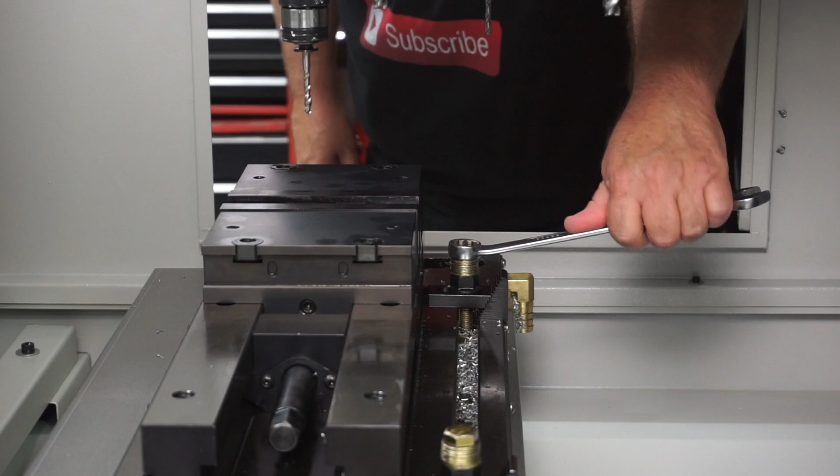No doubt if you've been following me on Instagram, you would have noticed over the weekend I've been cutting chips on my Syil X7 and making some T-nuts and toe clamps that will help to hold my brand new Orange Vise. Now, you'll probably see here in the video, guys, the reason I need to do this is because my Orange Vise, I run it parallel to the X-axis and not like the traditional parallel to the Y.

Now, this has its advantages and disadvantages, but for me, one of the disadvantages was that the 6 toe clamps that Eric sends you with your vise won't fit. So the 3 will fit on the front, but for the rear, I needed to make some extra long ones. Now, I tried to model these pretty much like the same ones that Eric supplies, and Eric's obviously made his on a mill turn machine, so I wanted to try and get that pattern on my little toe clamps, but I was limited to the size of the stock that I had here.

You can see here in the video now, guys, where I'm actually fitting it to the table. And yes, I agree it is an aluminium T-nut, but if you use the full length of the thread, it's pretty much right. And I can't see this moving anytime soon. So what I'll do now, guys, I'll cut over to the CAD video and the CAM video and just show you what I'm going to get up to, and then we'll get into the machining footage.

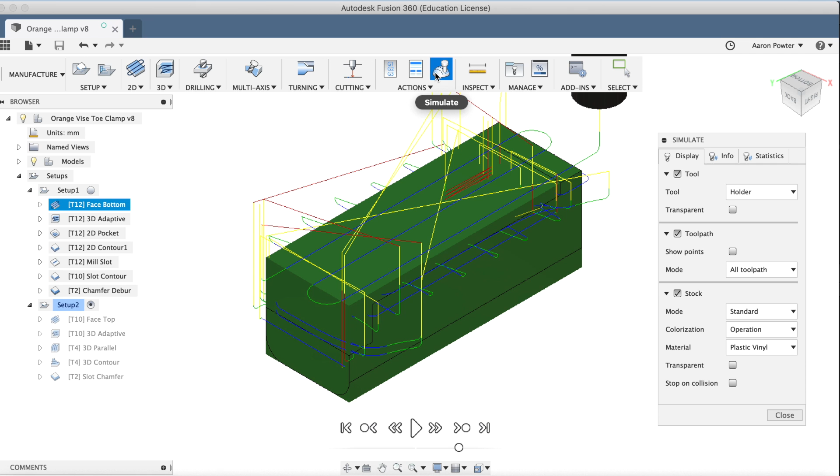All right. So here in my CAD model, it's quite a basic model. A couple of sketches, a couple of basic extrusions and features, that sort of thing. It's basic parametric modeling, nothing fancy. But the CAM here is pretty much basic on the bottom side, and I'll run through that now for you. If I do the simulation, you can see here that I'm just facing that with a 12mm end mill, which is roughly 1/2 inch. And the reason I did that is just to minimise tool changes, and it's only the bottom of the part, so I really don't care if I don't machine it with a face mill.

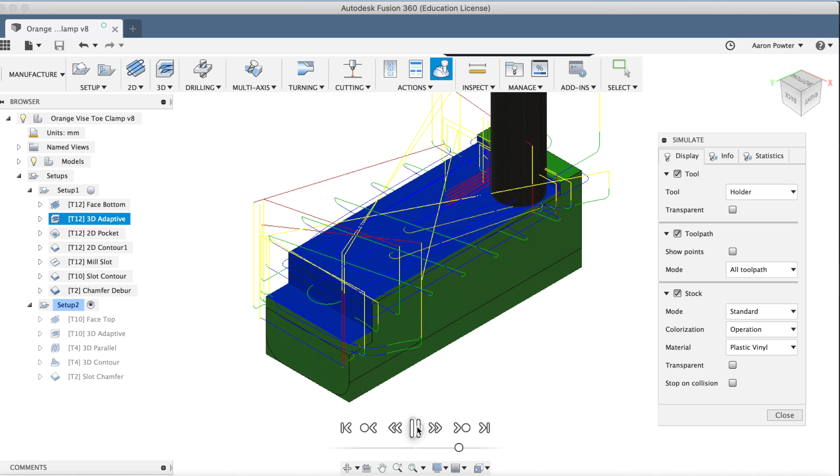In the next strategy, guys, I used a pocket strategy, and that's to clean up that adaptive clearing and get rid of those funny marks, and you'll end up with a nicer product. However, in saying that, for this part it wouldn't really matter. It's the bottom of a toe clamp, so I probably shouldn't have worried about it.

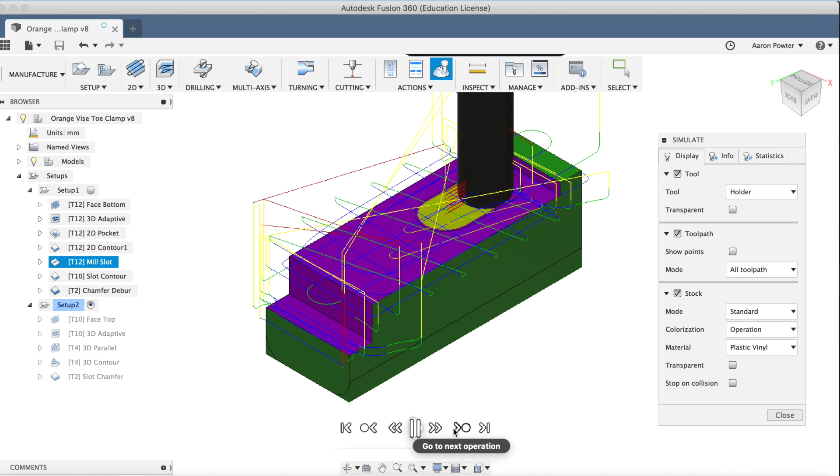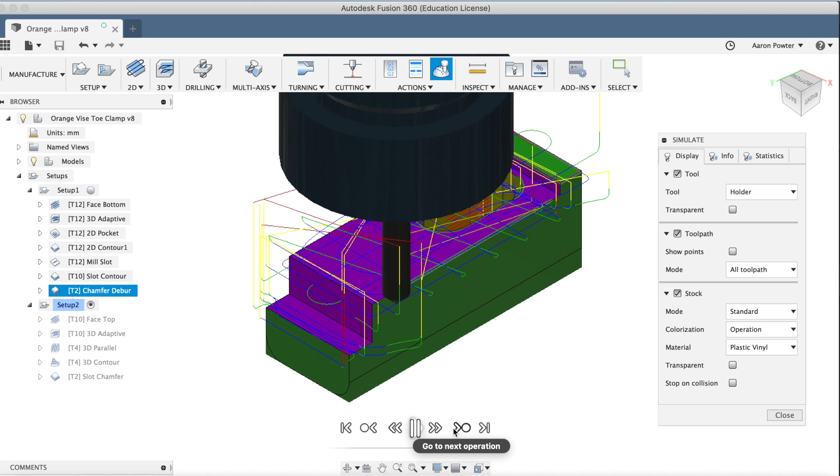Coming up here now with just a bit of slot milling, guys, to clean out that slot. It was fairly deep. It's roughly 1 inch deep, so I couldn't use my 12mm to adaptive clear it because there was not enough room for the tool to helically ramp down, so I just slotted it and chased it up, of course, with a contour, and just did a couple of multiple depths, guys, on that there to clean up the wall. You can see here my 2D chamfer to clean up the part. And there we have it.

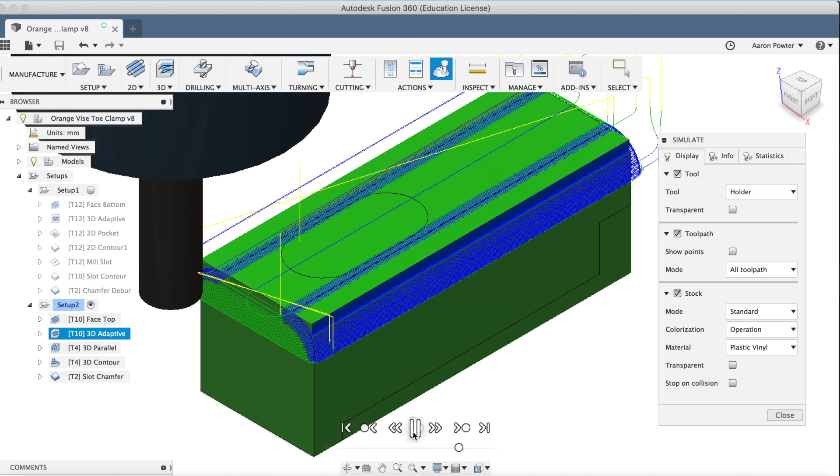So what I'll do, I'll flick it over to the top side now, guys, and show you the strategy on the second operation. And here we go. So just a quick little face just to clean up that top part. There's not really a lot of stock on there, so it's just like a little pass on the top to get rid of those dags. Here we have, guys, just a little bit of 3D adaptive to clean up those edges. And then I came in with a parallel strategy, guys.

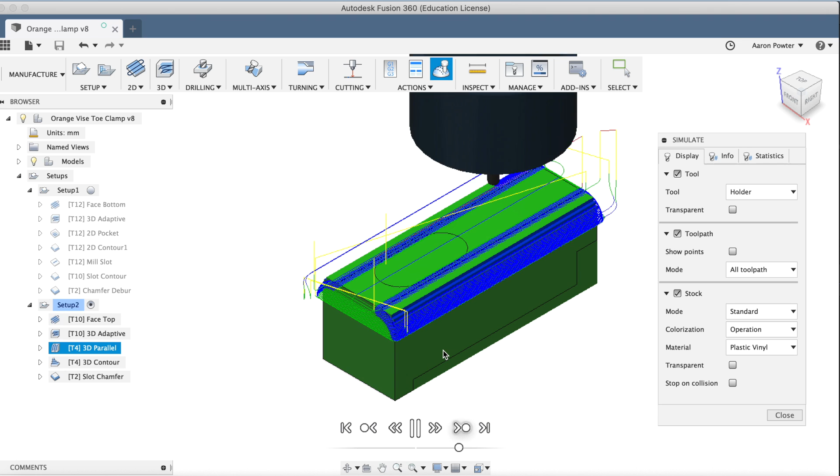Now, I could have done this with a contour, but I wanted this pattern. Now, when Eric supplies you the 6 toe clamps that come with a vise, it looks like they've been made on a mill turn machine. So I wanted to have that pattern. I'll just show you here, if you don't mind, what I could have done was this strategy here, this contour strategy where it goes round and round and round, which would have been quicker, but I actually wanted that pattern. And just the last bit, guys, was to clean up that slot on the top there.

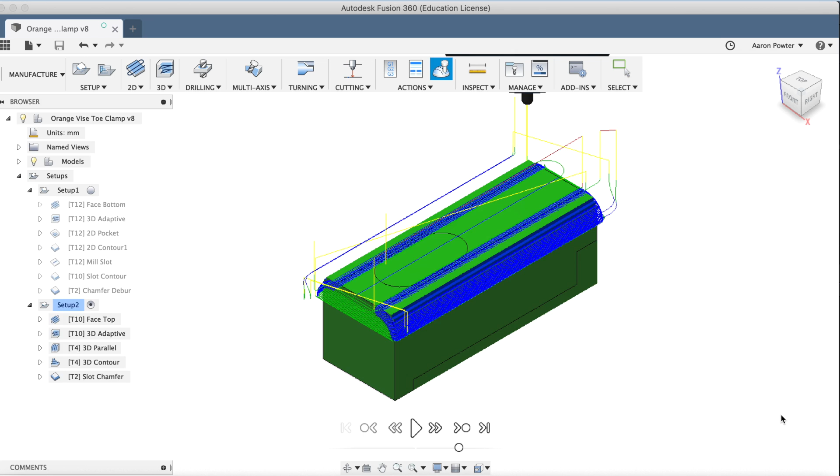Now, remember when you're doing your 3D tool passes and that sort of stuff, guys, there's a couple of little tricks that you need to do from time to time to get it to work properly. And these are stuff that Kevin Ellingson has shown me previously, both personally and also in his videos, and little tricks that I picked up when I went to Autodesk University. So I'm talking about this stuff over here about tool contact boundaries and additional offset, and here you type in negative tolerance and that sort of stuff. Kevin goes through these in depth in his videos, guys, so I won't cover that here.

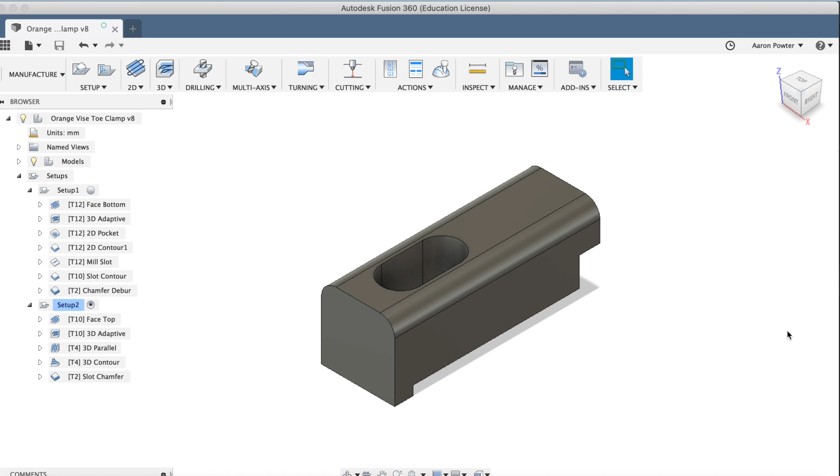So anyway, look, without further ado, let's duck over. Let's look at some CNC machining, guys.

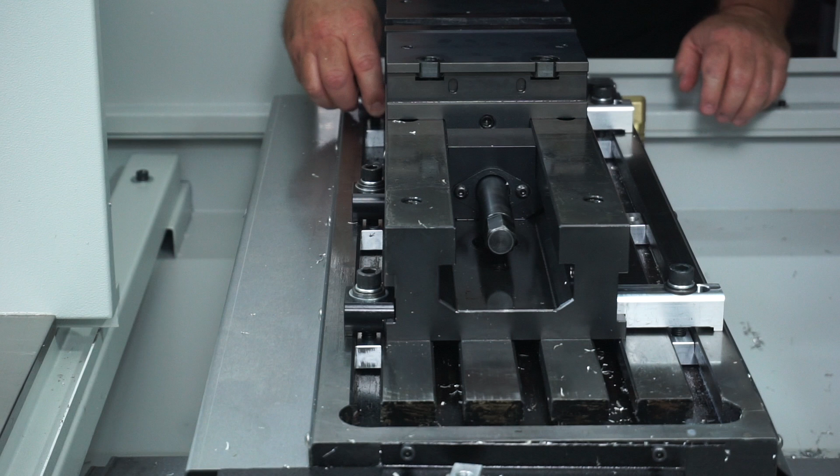Okay, so that concludes today's video. I trust you got something out of it. I trust you learnt something. I know I learnt something from it. Really enjoyed this little project over the weekend, and totally satisfied that I've finally got my Orange Vise bolted down properly and not dodgy like.